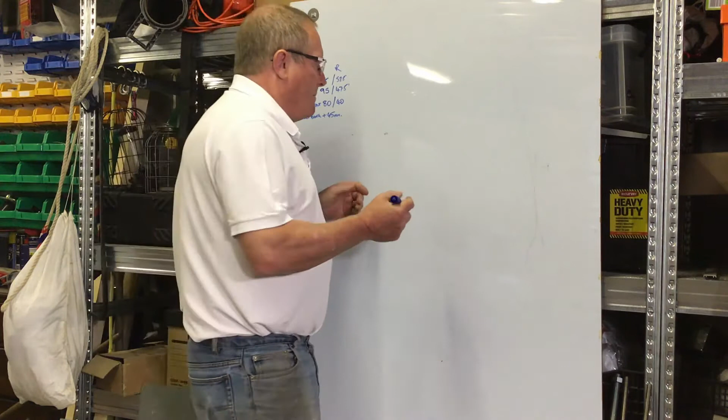Right, so a few little bits about what we're going to do with the frame. What we need to do is create 2 rectangular frames that we will then connect together with cross braces. Those rectangular frames need to be 1400mm on the long side, and as far as height is concerned, the wheel itself has a radius of 47.5.

When we add a pillow block onto the top of here, that will give us about another 45mm of height. So I'm looking at making these uprights something like 600mm. We don't want them too high, otherwise the thing will be more unstable, but it's obviously got to be high enough to provide clearances on all sides.

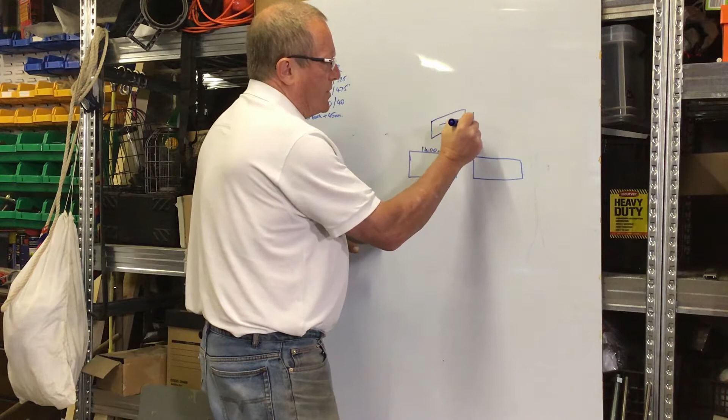Once we've made the 2 frames, we can then put them together to make up the frame itself using some cross braces. Now the width of the cross brace will be very much dependent on the width of the wheel and the shaft. I've got a maximum width here of 400mm because that is the length of the drive shaft that we've got coming.

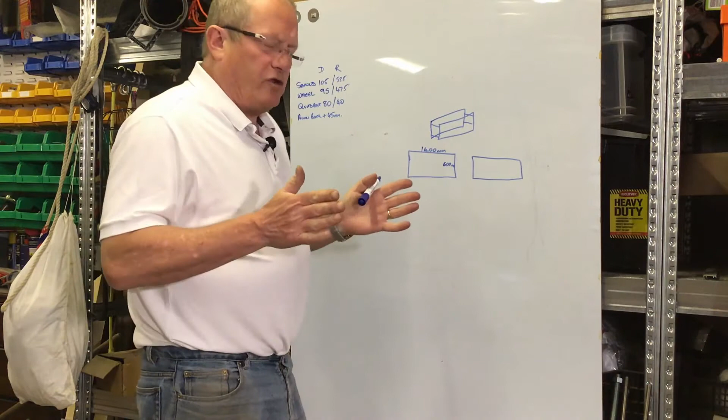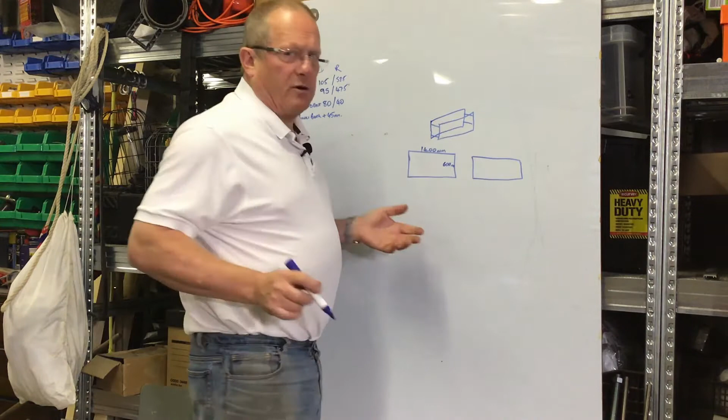But if I can, I will try to reduce that down a bit to the point where it's manageable, but obviously the narrower it is, the more unstable it is. We then have to look at the cross braces, and I want to actually put the frame together and feel how unstable it is before we get started. That will show me whether I have to put in any braces on a diagonal, bottom to top, or even between these 2, just to stop it from flexing in different directions.

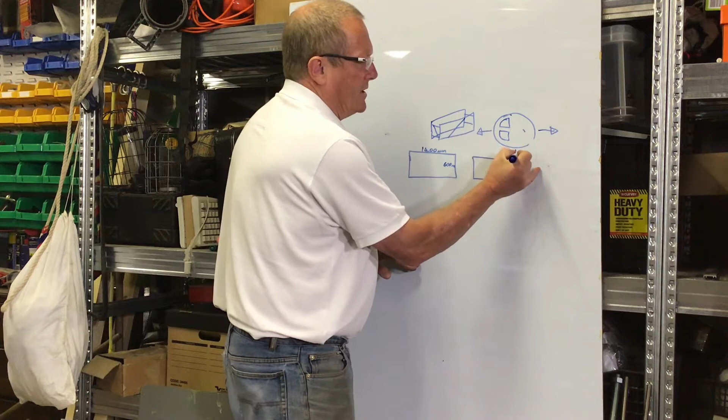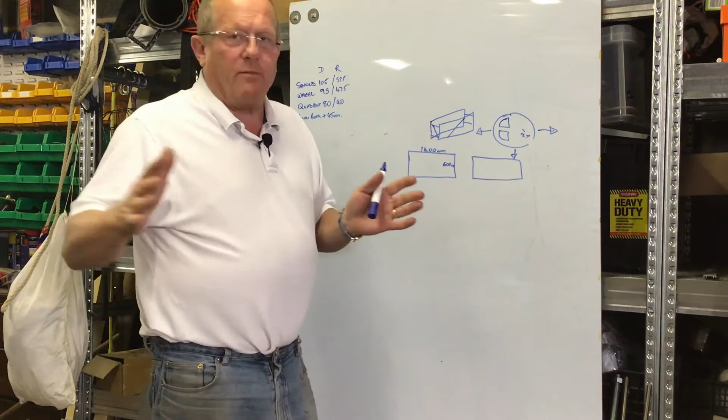When a wheel turns, a bell wheel or any other wheel that's weighted like this, with all the weight at the bottom - if you imagine the wheel, the quadrants we've cut out are here, all the weight is at this part here. As the wheel rotates, the forces will be like this, and I think the amount of force this way is equal to twice the difference of the weight within the wheel. So there's going to be forces going that way, and what we don't want is for the frame to tilt over.

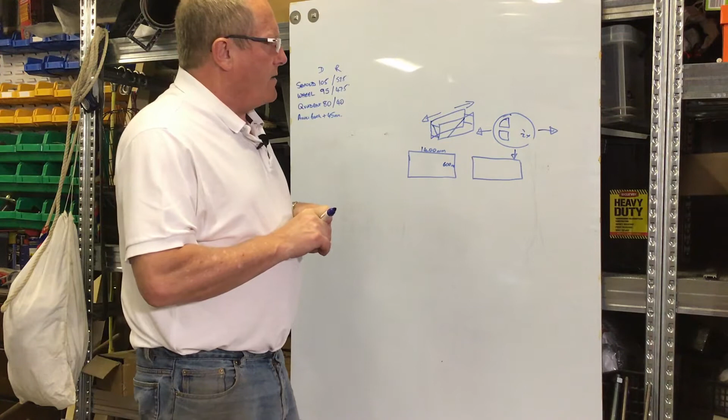So the first thing to do is to make these 2 frames, so we might as well get on with that.

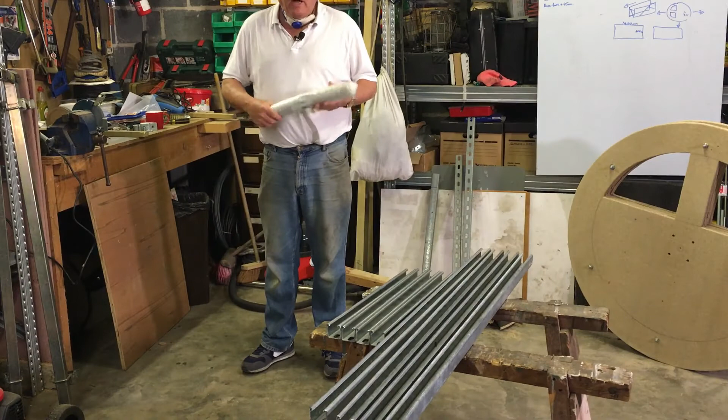Right, I'm quite excited. Not only have I got a cup of tea, but while I was doing that the delivery came, and this appears to be my shaft for the centre. It's finally arrived. So let's just have a quick look, see what we've got. And that should be, I hope, 400 millimeters.

Bang on 400 millimeters. So the idea being that this will fit beautifully into the pillow blocks and be clamped down, and that is going to be the spindle on which our wheel's going to turn. I very much doubt if it's going to bend.

Okay, so we've got the shaft, we've got those pillow blocks. What we now need to do is to actually make the frame. Each piece here needs to have 2 uprights on it, one at either end. So if I get rid of those 2, and 2 of the shorter ones.

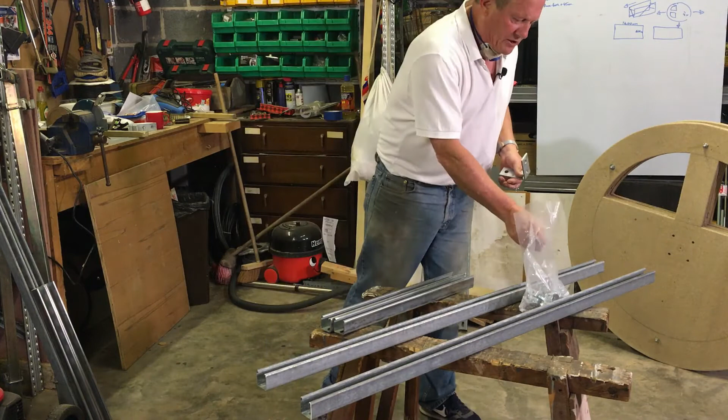First thing we need to do is attach the bracket to each end of the smaller ones, and then we can put them onto the larger ones with the bracket on. I think that would be the easiest to do. So we need some 10mm threads. And then a second.

As you can see, it's a very quick way of assembling. A couple of nuts and washers.

And we can slide that up to the end. I'm not going to tighten them, but you can see that's going to be a very solid bracket when we put it onto the other one. So now I'll do the same on this end, then do the other 2, and then we'll get them attached.

Well, it was all going so well. I just put the brackets on the end of the other two uprights and went to get the zebs to attach them to the other long frame sections, and I looked in my zeb box, and unfortunately I have a lot of 6mm zebs, not the 10mm ones, of which I only now have 2 left, which I want to use on the frame for strength. So I'm going to have to go to the suppliers tomorrow and pick up a box of 10mm zebs so I can continue. That's all I can do today.

Right, I'm delighted to report that I've now had the delivery of a box of zebs, as well as some brackets that I also need, and we can therefore continue with our frame construction.

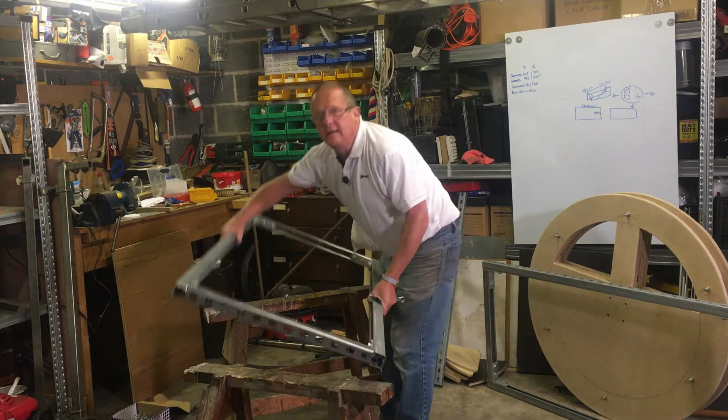So there we have frame number 2. All we've got to do now is put them together.

But first of all, of course, we have to determine how far they need to be apart. Now, the shaft that we bought that arrived the other day is 400mm, so that is probably going to be the recommendation. So if we make sure that they are square, and they actually look square to me.

We now need to fit the cross braces, which we'll actually attach to the inside of the frame and then across. So I'll make those, get the length cut to 400 minus, plus the width, because they need to go right to the outside, and then we can get those cut.

Right, we've got our 400mm pieces of unistrut that we're going to use to make the frame.